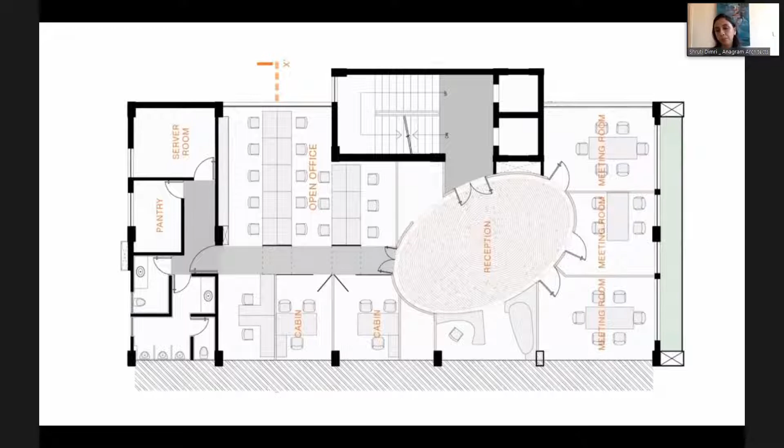But in this office, the hierarchy is such that fewer people at the top needed to be on the top floor, and the heart of the office, which consists of the maximum number of people, was housed on the lower floors. So gradually the floor plate could recede inside, and we could get this shape.

By doing this shape, it also provided an opportunity to cut windows on the side, on the longer side of the site. So even though right now there is no building next to this plot, in the future if a building does come up, it will not take away from the windows lined all across the side elevation, which also meant that on each floor plate you could get natural light coming not just from front and back, but also from the side.

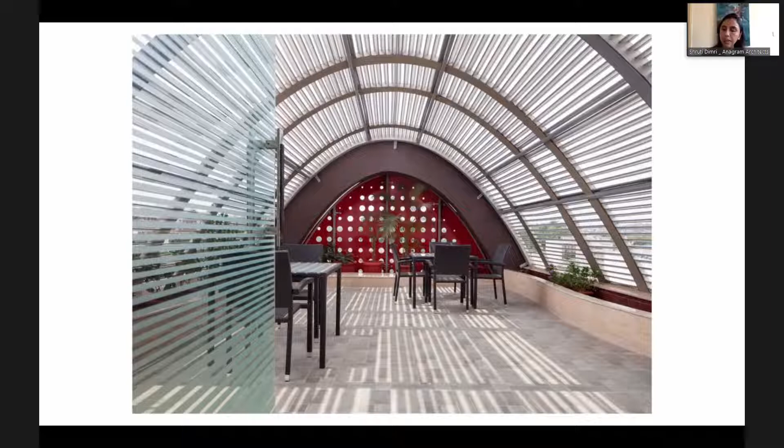So that was one building. Now I'm going to show you another 4 or 5 of our buildings in detail, but today I've picked projects to show you that particularly talk about or show you how we've approached elevation design. So elevation design, building, especially in Delhi where the plots are tight, you have that one frontage very often only, unless it's a corner plot. And then what can you do on that front elevation to sort of have that identity or have that unique expression, even if your building footprint is small.

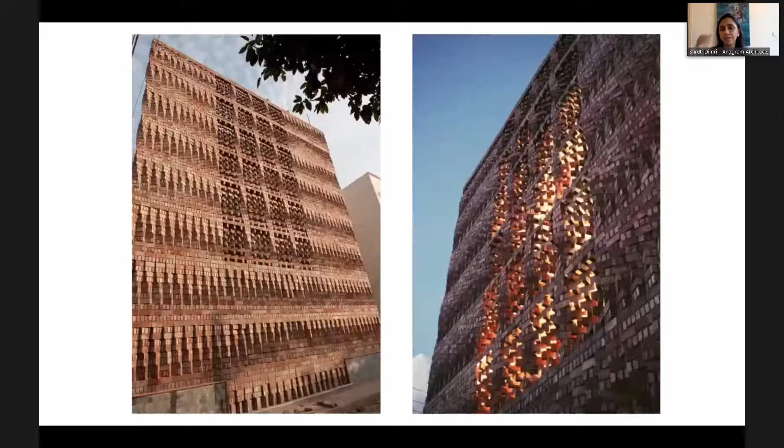This building that I'm going to show you now, South Asian Human Rights Documentation Center, is a very small building in Hauz Khas, near outside Hauz Khas extension. It is small, as in it's a 50 square meter plot, and it's a corner plot, and this wall that you see again faces the west. So facing the west is usually a challenge because you can't give a lot of glazing on that wall, which you would really usually prefer, because then you can get a lot of natural ventilation, but then it provides an opportunity to do something completely different or try something different.

Now this is one of our first projects, which means it was finished in 2004. It was a very small building, a small office for an NGO, and the budgets were really, really limited. So at that time, we were sort of relegated to using brick and trying to interpret brick to make something that is interesting.

It was quite an uphill task at that time because, since 2004 and 5, we've seen a lot of advancement in using robotic arms and placing exactly these bricks that are turning around like that, angle by angle. But at that time, for an untrained mason on site who'd not done or seen anything like this before, it was quite a challenge.

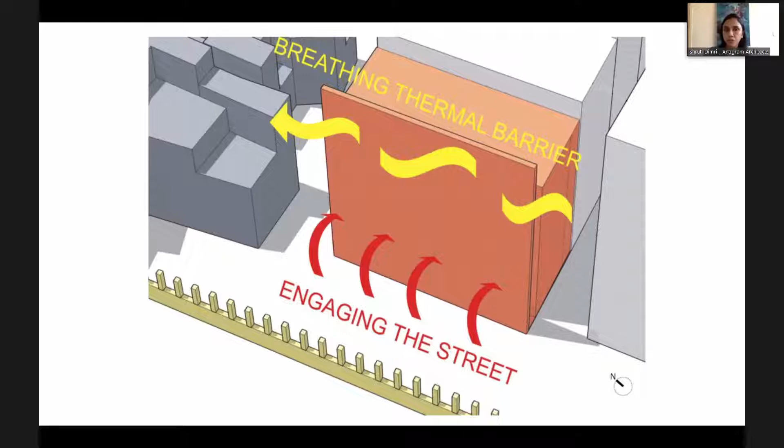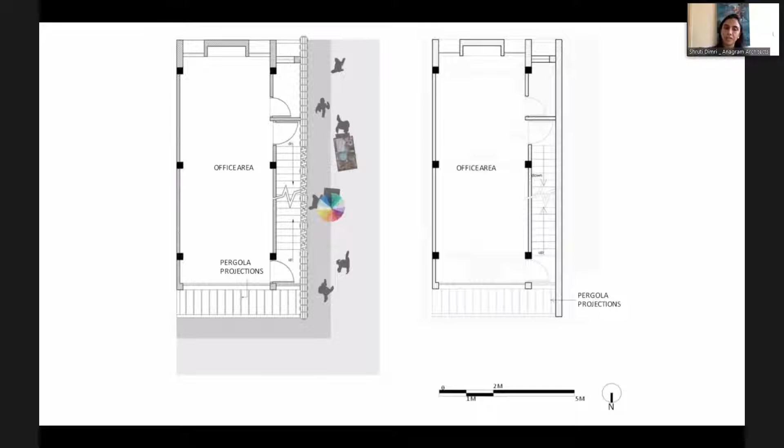That's the small, humble plan of the building. If you notice, the staircase doesn't even wind around - there's no space to have a dog-legged staircase. So you take one single flight up to the next floor, and then through that office you come around to go to the next floor. That's how small that plot is.

I don't think the picture shows this, but through this twirling course of bricks, we also used reinforcement, like metal bars, for it to become stable. It's not just an arrangement of bricks on top of the other - that wouldn't work. But these are things we realized, or were able to design, after having worked on site and going through a series of failures on this.

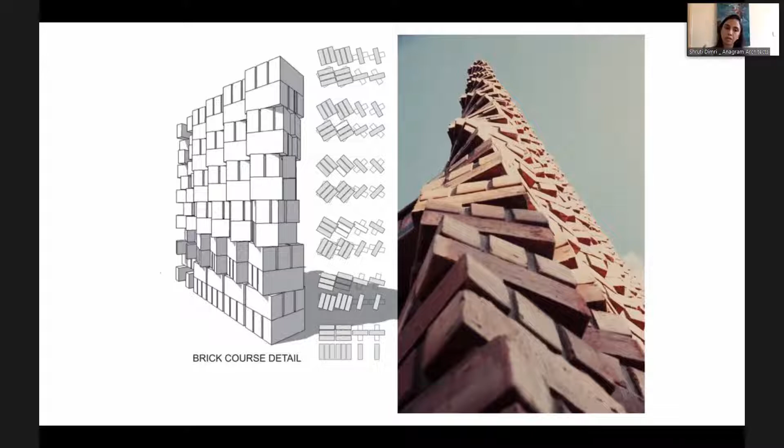That's another view. On the left hand side, you see the SketchUp model, which is the easiest thing to make, and the various courses. For each single set, I can count 1, 2, 3, 4, 5, 6, 7 - about 10 courses before the first course is repeated, which is why in one floor you get about 2 twirls of the brick.

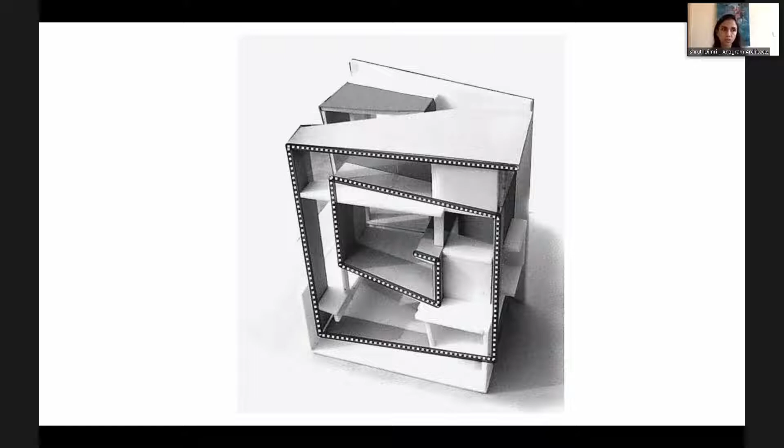Okay, this next project is a residence for an artist, situated in what is known as Kaladham, or Artists Village, in Greater Noida. This is a community where the government had parceled land to be given to different artists, so a lot of artists could occupy space in a similar community and make houses for themselves the way they wanted, and sort of learn from each other.

This was made in collaboration with artist Anita Dube, and she's not up and coming - she's actually a celebrated artist in the city. Her idea was that she wanted a house where the studio, which was to be almost 80% of the space, was to be her workspace, like an intermingling of continuous layers.

So you see how the plate sort of - this is a model of the house - but you see how one surface starts from the top, and there is an intermediate inner layer also, not apparent in this section, but there are 2 layers that roll around each other. When these 2 layers go through different floors - there are 3 floors, ground, first and second - they each become a wall somewhere, and when they turn around and become horizontal, they become the floor.

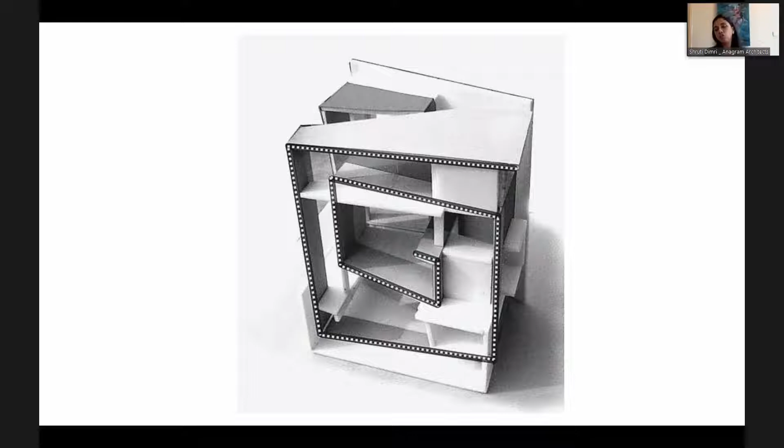These 2 different layers, for them to look distinct, we used 2 contrasting materials - one was concrete and one was broken tile. So that was one idea. You'll see more diagrams of this, and I'll show you a picture of what I mean by the concrete folding around as a ribbon, with the broken tile surface also going around.

If you see the lower sketch, she also wanted the house - an artist's house and workspace - to be a display of art in itself. What she wanted was to be able to paint on the walls, do art on one wall of her studio, and then turn the wall around right there so it's immediately on display outside.

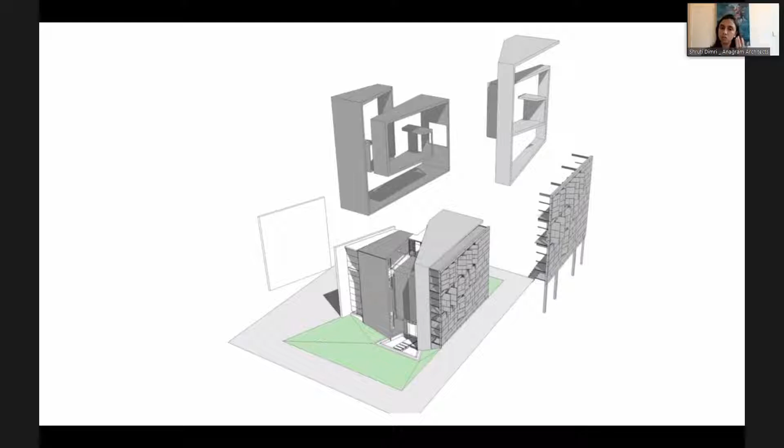So what looks like louvers here are actually pivot surfaces, pivot walls outside, if you will. She would create the art standing on the second floor or first floor, and as soon as she swivels it around and turns it, it's on display to the world outside.

It's fine when it's running on the wall and then curving around to go on the floor. But where it goes to the ceiling, it's difficult to put broken tiles onto the ceiling. So we created these panels, which were made to order, created, fixed, taken off, stuck tiles on, and then again installed in place for it to go around.

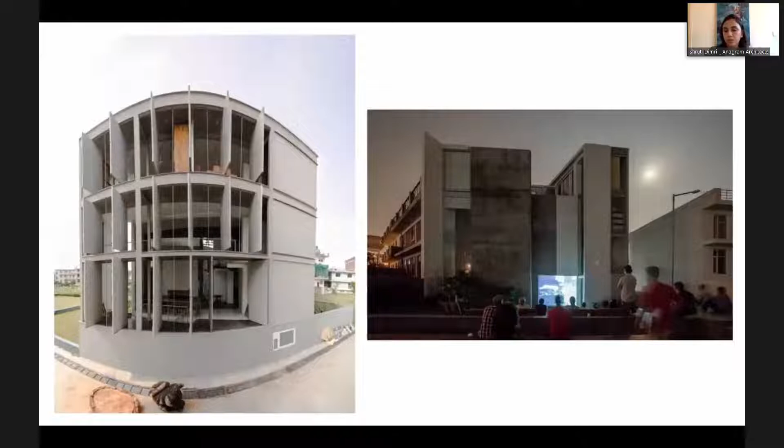Right, so that was Artrovert. Next project is what we call the Outré House.

I said a little before that over the years we've got ourselves a reputation of doing things that have not been done before. It's sometimes not to our advantage because there are clients who come to us looking for something they haven't seen. They want to be surprised. And then to get to that stage, or to that iteration where both the client and us feel that okay, we've got something that we've not done before, we're very excited and nervous.

How do you know that you've got something you've not done before? Because you're excited and you're nervous, right? So once you start feeling that, you're on the right path.

But this house that I'm going to show you, we did about 23 iterations on it, because anything that we made and presented checked all the boxes of what one needs in a house—it had all the rooms, it had everything—but it looked like it had been done before, or we had attempted it before.

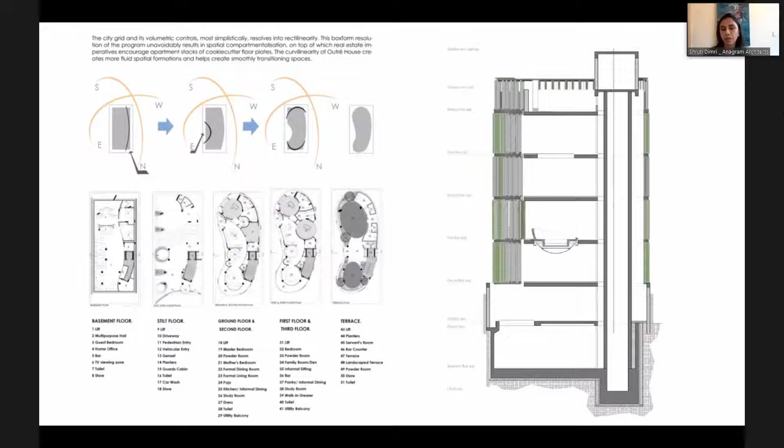So this is the front elevation. And again, like I said, when you make something that's so non-standard, you can't clad it with straight material.

We made faceted walls, but this had to be finished in a material that's possible to wrap around the entire building. So you see these wood louvers that go all around the building. These were created from shipwreck wood collected from a place in Gujarat, where they dismantle old ships. This is seasoned wood, so you can buy it and turn it into whatever you want, and it's absolutely exterior grade.

Similar to the building I showed you earlier, which curved in the vertical direction, this one is curving in plan. The advantage is that you can have windows all around, because it's not sticking to the sides anywhere—there's no straight line. So even if it goes close to the next building, at the next moment it winds away again, letting light come from all around. The louvers become visual barriers on one side, and in front they become smaller in height to form the railing.

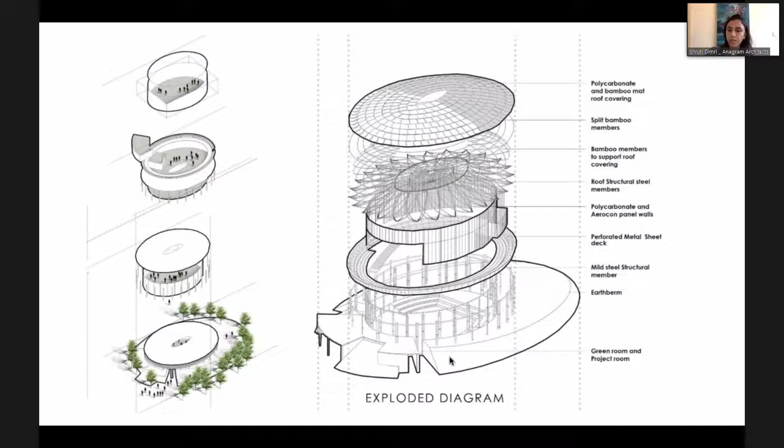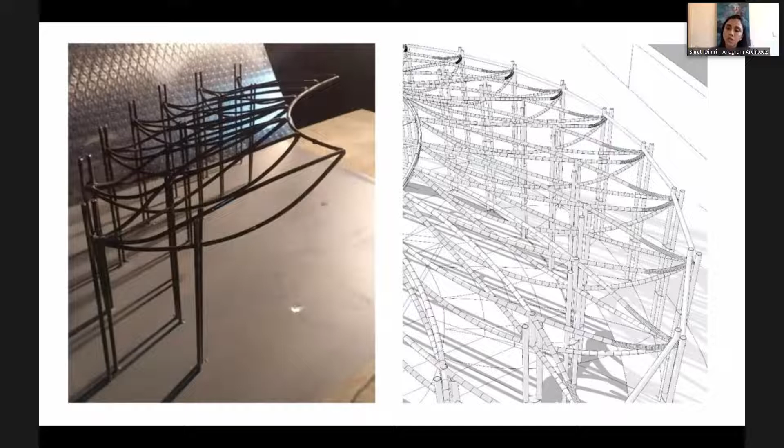That's how the pavilion comes together—it's a performance space. These are images of how the trusses work. They were brought to site in less than a month. It's all dry construction: you bring it to site, tighten it up, and after the performance is over, undo it and take it elsewhere. From inside it's metal as well as bamboo. The staircase winds around this elliptical structure, also made in metal.

This is a sort of viral image that went out from our Instagram handle when the exhibition was on.

Okay, this is the Doon School Teachers Housing. This is a school - the Doon School, Dehradun, has existed since 1935. It's been around for about 80 years, which means it has that long old heritage, and structures have come up. It's a 45-acre site in Dehradun, and different structures have come up over the last 80 years as their numbers and requirements have increased.

A lab here, a music department there - and in the series of these new constructions, the most recent one is this, which we built as housing for teachers, because they wanted more masters and teachers residing on the campus rather than outside it.

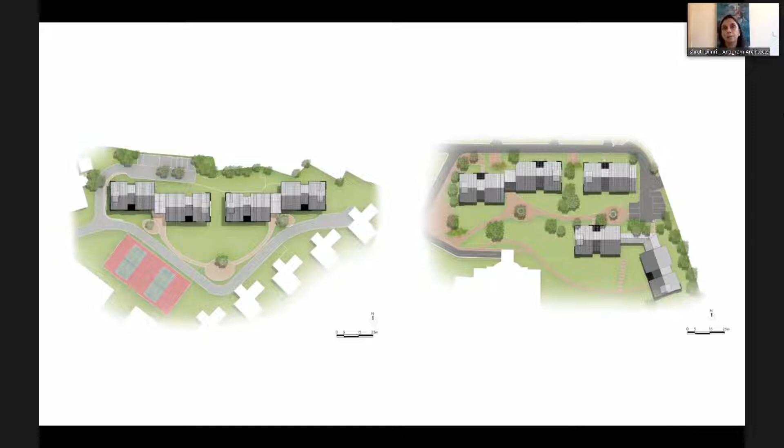So we identified 2 pockets - these are 18 houses in all, with masters and teachers living on campus in a place where students also live. It's a very tricky equation, because you want to be appropriately close to the teacher, but not too close. Even for the teachers - you live in your workplace practically, seeing them in the morning and in the evening. That's your life. So how do you create a space where you can have that privacy, but also feel a part of the entire campus?

The structure of the housing is such that it's 4 apartments to a core - 2 apartments on the first floor, 2 below - but they all get independent access.

If you see this, it sits amidst sprawling open greens, and the vocabulary of the building elevation had to give a nod to the 80 years of construction that existed on site, which was all in brick.

A lot of it was constructed before independence. The initial buildings were all exposed brickwork, whereas here, because we wanted to say we haven't completely copied the kind of architecture that existed then, we wanted to carry forward the legacy of the brick, but use it in a new way.

So we actually used brick tiles, which give the sense of a red building that merges with every other red building around it, but still has this modern, contemporary touch to it.

The portals that you see were created to give that sort of English bungalow look, but at the same time seem like they were made in the new millennium - they were made in 2014.

The portals are made and clad in Gwalior stone, which gives that crisp edge that cuts through the red mass of the main building. That's the entrance.

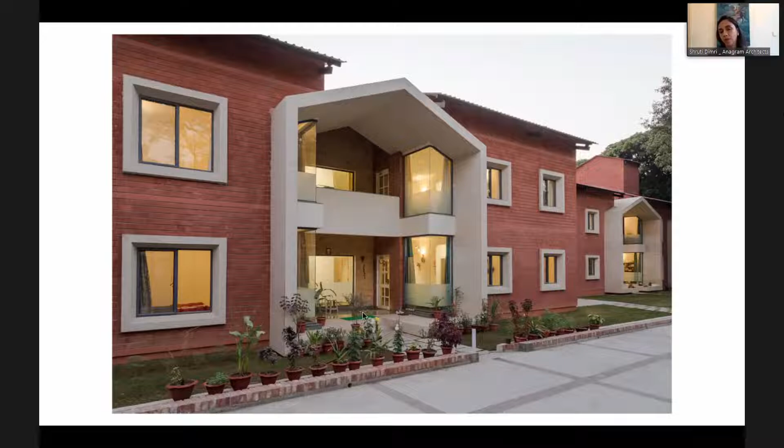More pictures of that - that's how the main core looks. Absolutely open - you can get your bicycle right till the center.

I also wanted to point out one important thing here. One of the challenges was that Doon School is a very, very green campus. Dehradun itself is blessed with a lot of greenery and has great climate for vegetation. In fact, one of the trees on the Doon School campus is the oldest rubber tree in South Asia, as far as I know. So there are these precious, beautiful old trees, and we had to construct the buildings in the middle of these.

In Dehradun, you cannot cut a lychee tree, but even the other trees that were allowed to be cut, we didn't cut, because we tried to build really close to them. This right-hand side picture shows how the foundation and balcony are designed in such a way that you go really close to the roots of these trees without damaging them.

So how the trees take having construction being done around them is that they sort of look a little sad for a few months, but then once the construction stops and people start living and occupying the space, the tree again sort of takes its space around the building. So that was, I would say, quite an achievement for us on this project.

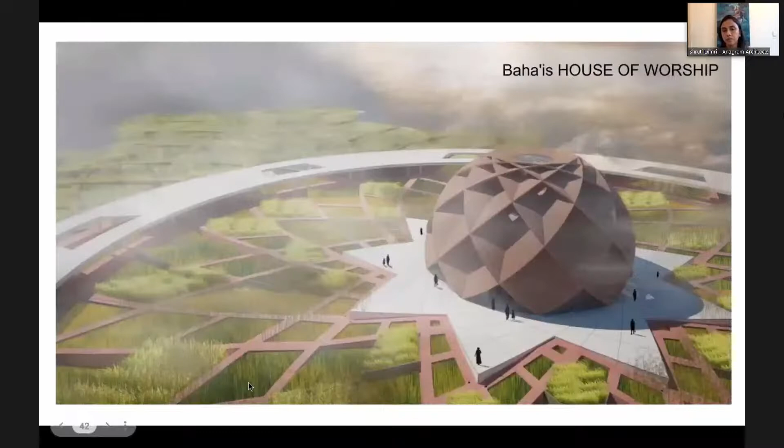I'm going to now show you 5 quick slides of some of our unbuilt work. I said in the beginning that we try to do things we've not done before, and that extends to how we interpret the program, how we interpret the materials, and also the form.

This particular building was a competition entry for the Baha'i temple. The Baha'i faith believes that their architecture needs to have 9 corners, so this shape evolved out of that requirement, and this was to be built completely in poured concrete. So that's a new shape that we explored. It protects itself by how it's designed, from wind movement and rainfall, even without glazings.

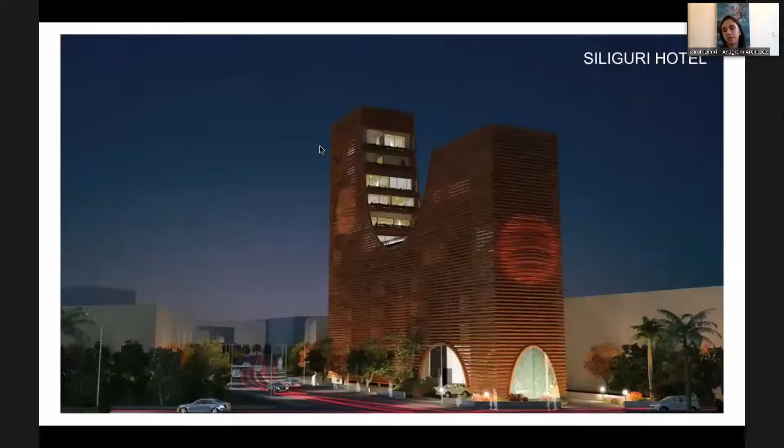This is another project, also in the unbuilt category, that's won an award. It's a hotel on a very, very thin plot, an impossibly thin sliver of a plot. How do you create a hotel where setbacks are going to take up a lot of that site? So you create a hotel which is like a thin sliver of wall, and the windows open not onto the longer side of the elevation, but onto the shorter side, and you take it up to create this interesting shape here.

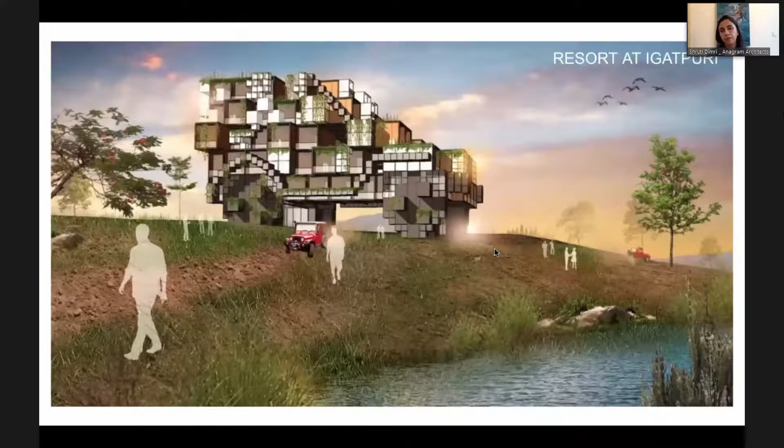This was in Siliguri. This is a hotel for the Mahindra group that we had proposed. It's in the shape of the Mahindra vehicle - sorry, I forget the name of it now - but it's in the Lego format of that hotel. Each of these little blocks are like metabolic particles in the design, and that sits across. This is in Igatpuri.

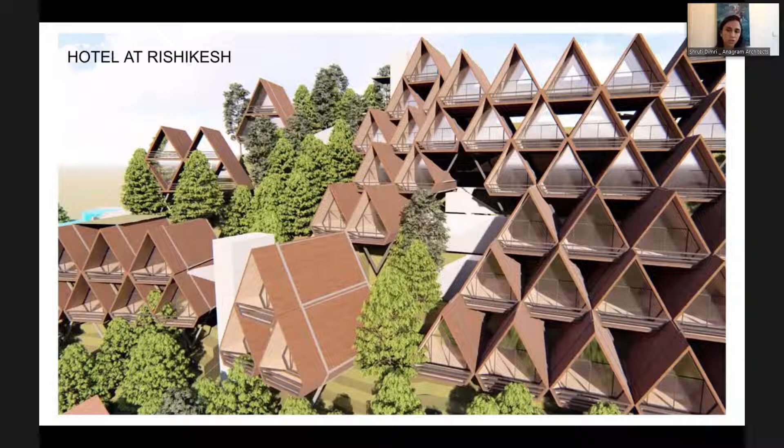That's another hotel that we're doing in Rishikesh. Modular structure, again all triangles, because the slope of the site is such that it lends itself to creating something which is structurally like this, modular and sort of plain across the slope of the site. And that's it.

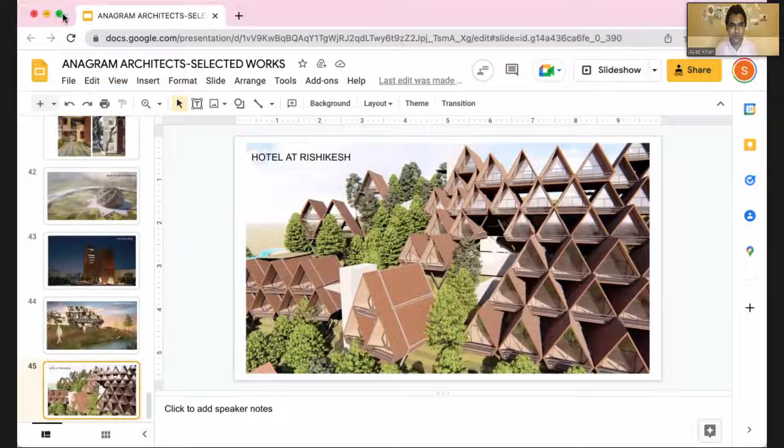Good timing. Yeah, Ayaz, thank you very much. Thank you, this is wonderful. If there are any questions, I would be very happy to answer. Yeah, so I request you to stop sharing your screen so we can have a conversation here in the Zoom. Thank you.

Oops, there's something wrong with my video, please kindly ignore it. So Shruti, it was really wonderful to see the exploration that Anagram has been doing with materials primarily. Number one, definitely there's a lot of exploration with the materials that you do, and also at the same time the exploration with the form, the formal expression that comes primarily from the program, from the context, and there's a layer of material and form that gets added and gives a distinct character to each individual project.

But I was actually trying to go through all these projects that you showed, and in the beginning you were talking about how you're trying to, as a firm, discover the style or something that binds your approach to all these projects. So what is it that you think are those elements, those design directions? Could you repeat the question? You're asking me what guides our design approach - is that what you're asking?